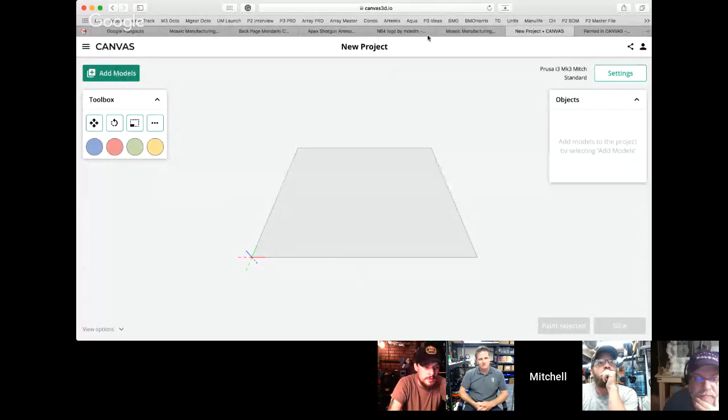So if I go ahead and download that, and then I launch into Canvas here, I'm going to make a new project. So here's my workspace. I'm going to add the model in, which I did not actually download. Here we go. I'm going to bring in the N64 logo, and it's going to pop up there. And of course, it's a single color.

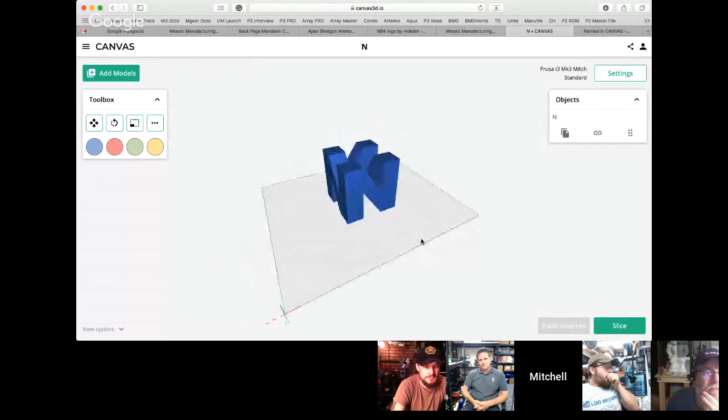If I wanted to go print that on my Prusa i3, then I could hit slice and I'd be good to go. But let's turn this into something that looks closer to the actual logo from N64.

To do that, I'm going to click on this. I'm actually going to rename it. Let's call it N64 logo. And then I'm going to hit Paint Selected. So we just launched into the Paint view here.

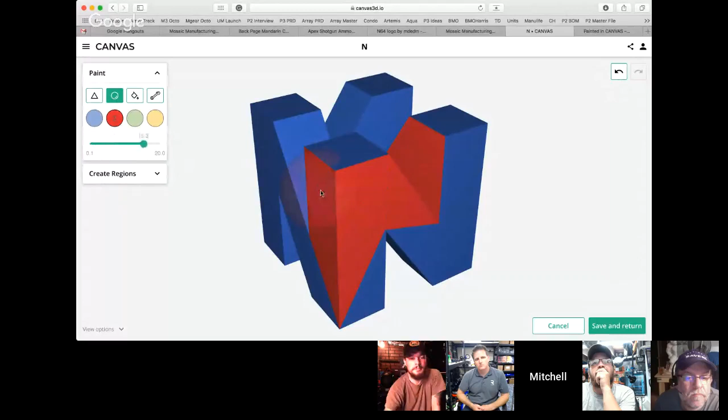And in this painting view, I have a few different tools. This first one is going to let me paint a single triangle like that. Sometimes that's really good for little details. This next one over here is a paintbrush. This is going to let me paint multiple triangles. Again, useful. And I can change the size of my head, so by making it really big, I can paint faster.

One of my favorites is this paint bucket tool, kind of like in the old MS Paint. So what I can do is I can go in here and create regions. What it's doing is auto-segmenting the model to create different regions for me that I can then paint.

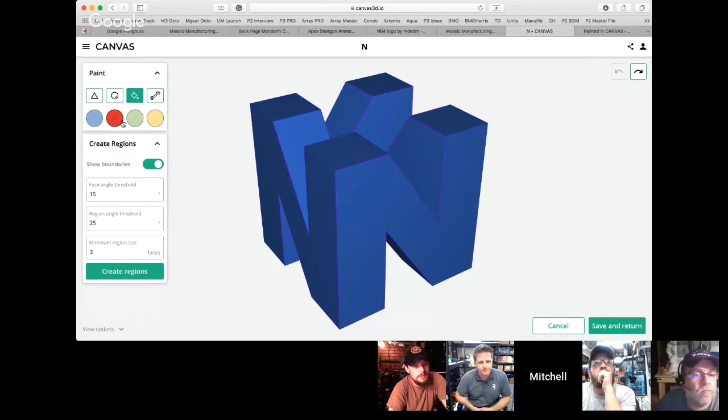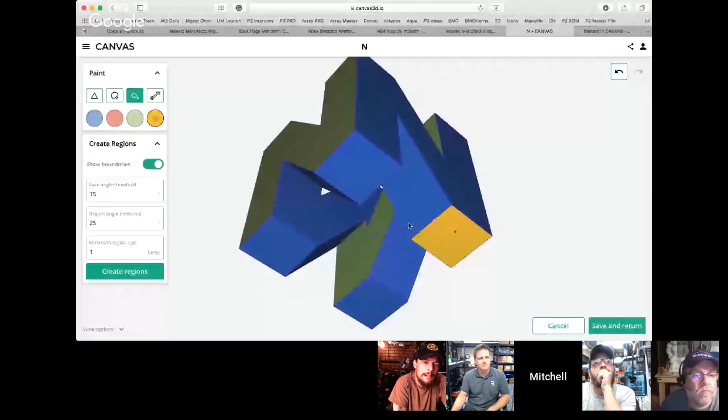So to try and make it look like the actual N64 logo, I'm going to go in here and make this side green. Oh sorry, I'm going to auto-segment. I wonder if I should go to, here we go. I'm going to make that part green, that part green, that part green, this part yellow. I think that one, that one, that one. And there we go - in literally like 30 seconds, we've now turned a single color STL into a 4-color one.

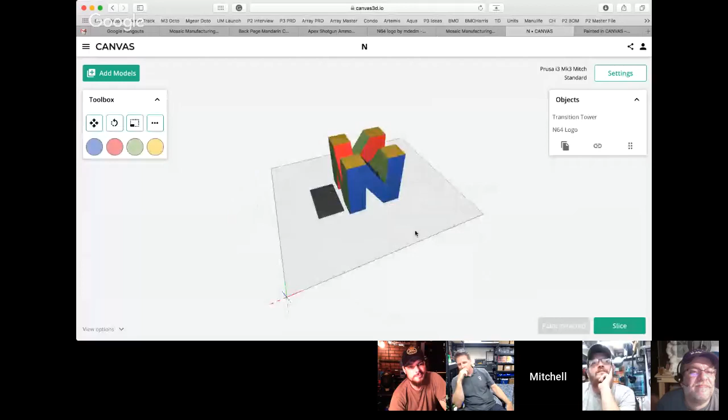I can save out and return here, and this guy is now ready to slice. I can do whatever I want with it - I can make it bigger, smaller, reposition it. I'm going to move this guy to the front of the bed for printing. I'll take the tower, put it behind so it sticks nicely. I'm going to stretch it out a little bit. And now I can slice.

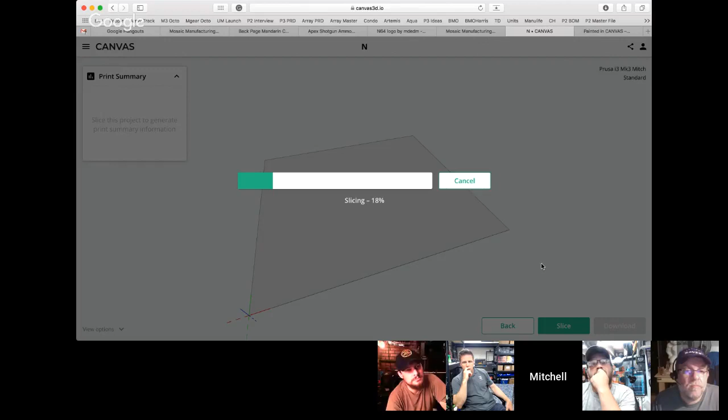So what we just did is, again, took a model into Canvas, we painted it up, in this case using the paint bucket tool. Now Canvas is processing that model, taking the color which is on the surface, and creating tool paths which will print really nicely on the printer. Because in 3D printing, for anyone who's used multicolor printing before, you'll know when you have color on the surface of the model, it isn't just on the perimeter. There needs to be a 3D toolpath that goes into the plane of the model, and that helps the extruder be more consistent in terms of flow, meaning the part will be durable. So Canvas is now taking care of all of that automatically - no matter where you added the color, it's going to make sure the toolpath will print nicely and look nicely.

So I got a question for you along those lines, because I'm curious, and I think a lot of people are: is there an intelligence to the amount of depth it uses to apply the color based on what the model is?

So for example, if something's 10 millimeters thick, does it go 2 millimeters in, or is it always a certain depth? For right now, it goes as far as it can, trying to create as big of a region as possible to give it as much flow as possible and the structural rigidity it might need. So the simple explanation would be it's going to the middle of the model, trying to create a pie shape.

If you have a circle, like the BB-8 model we'll do after, you'll see it starts creating these almost pie shapes into the center. I think the circle is the easiest one. If you get to a rectangle, it's going to create a line through the center. It's not actually going to the center of the rectangle, it's going to try and go sort of nearest neighbor across it, if that makes sense.

I can't imagine the algorithm you had to figure out to do all that stuff, man, that's bananas. And when you're using that, is it the same for the paintbrush tool or the paint bucket? Is the logic basically the same?

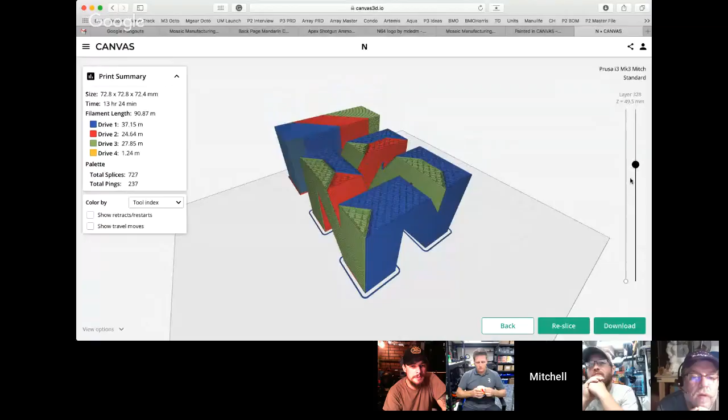That kind of was a question I was going to save towards the end after the demonstration, but that answers it a little bit. Canvas Slicer on the back end is using Kiss Slicer then to do the heavy lifting of the slicing? Yeah, for the most part. We've made some modifications ourselves to Kiss Slicer, but for the most part it is very similar. So things you'd find in Kiss Slicer, settings or things you'd expect there, are similar to what you'd see in Canvas as well.

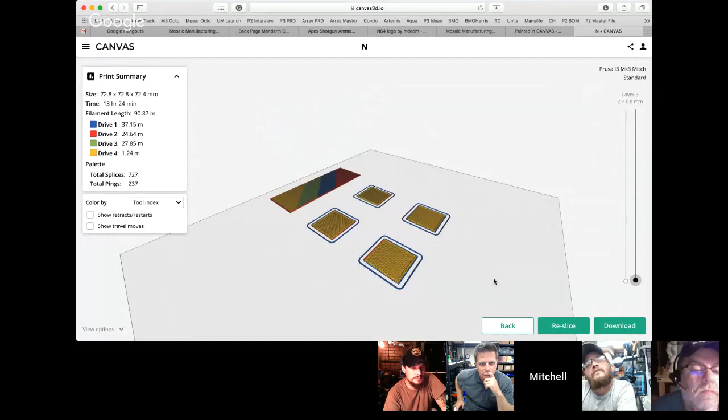Okay, so right now it's been sliced, sent back to my computer, and we are in the print preview. Let's start at the bottom here, and this is actually a really challenging region to think about how it could possibly be colored, because it's essentially a rectangular prism where the bottom is yellow, and then instantaneously the sides are all different colors, and they need to have an infinitely small thickness at the beginning.

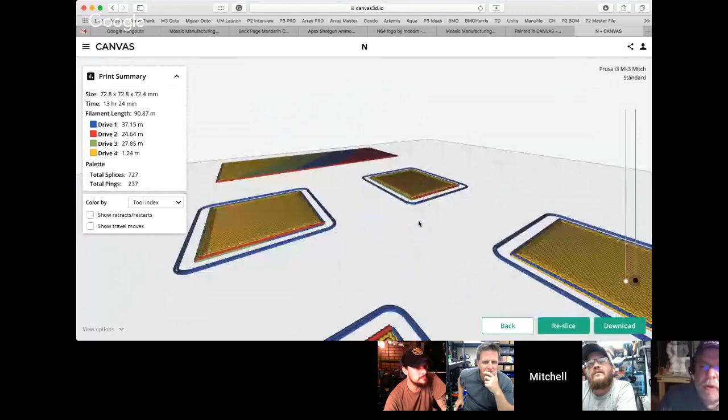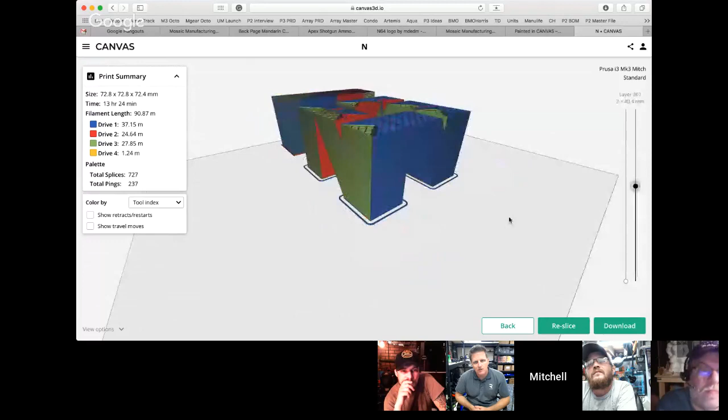So you can see what it's done here. It made the bottom couple layers yellow, and then right away it adds a single line. You can see right here on the sides, green and red. And then as it builds up, it creates that pattern into the part like Derek was saying. You can see the green is coming as far in as it can without stealing space from the blue or the red, and that way we're getting reasonably consistent extrusion as we possibly can. Then as we come all the way up, it's figuring out at a layer level the best thing it can be doing, and right when we get to the top, we get back to that cap of yellow.

So I imagine part of the advantage of doing it that way too is you're minimizing the amount of splices that have to happen, since you're painting as big of a region as you can before you have to initiate another splice.

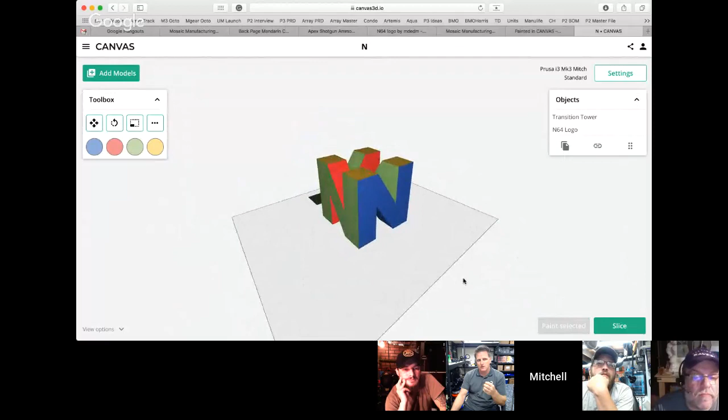So an example that comes to mind is the traditional way models will be broken up. Derek has a video on YouTube, one of our most popular videos, showing how to take a single color STL and break it up in Mesh Mixer. Not to hate on Mesh Mixer, because it is a very powerful tool.

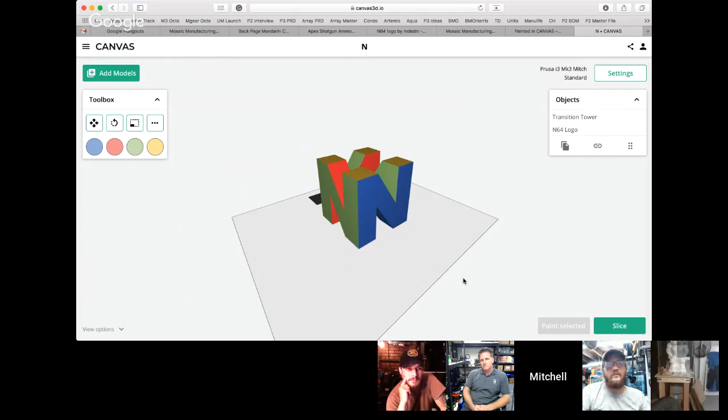But the way that's done is really different than the way we're doing it. One thing it'll do is create a 3D geometry into the part, and sometimes it won't just go into the part, it'll go down into the part and put colors on layers that aren't even seen on the outside. So your palette or dual extruder, whatever you're using, will create extra color changes for details that aren't seen, wasting time and material. Canvas is not putting color or splicing anytime you can't see the color.

Hey, it's funny what you just brought up. I'm going to hold this up here, you're probably not going to be able to see it, but this is blue on the outside, yellow here, but in between there's red. It did exactly what you said - it's putting colors in places, and I was watching it print and thinking, this is kind of weird how it's doing that, why is that splice going there, why is there red coming up at this point? But it's exactly what you just pointed out.

Thank you for explaining that. Of course, no, absolutely.

Maybe just before we jump into the BB-8 as a model that really shows off the power of paint, let's talk for a second about the vision - why we decided to build Canvas.

There's other slicers out there. In fact, for the first few years of Mosaic, we chose specifically not to build a slicer. We wanted to focus on being the best at one thing. We made a software called Chroma, which is still very popular today - it works with Simplify 3D, Cura, Slicer, all of them as a post-processor.

But we were trying to think about the future and what the experience needs to be like for multicolor printing to be adopted as the standard, so that a few years from now, when a printer is purchased, it'll just be commonplace that a printer makes multicolor things.

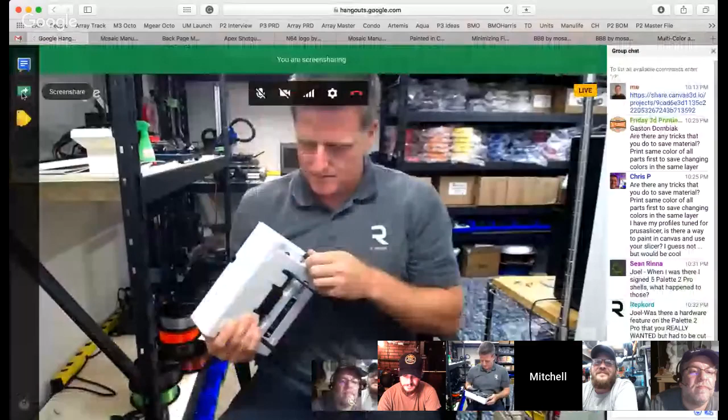But I really wanted those to be RGB LEDs, so when you were loading a specific color, they would flash that color, and you could do cool lighting effects, a bunch of cool stuff with it. I'm pretty happy we still have that blue underglow that shows up with the lights, but it would have been even cooler if it was nice and rainbowy, like it looks more like a gaming computer. But that was something that always got cut because RGB LED was maybe like 5 times the price of a regular LED, and frivolous. People already are complaining that palette is too expensive, and I understand if you have a 3D printer that maybe costs less than your multicolor accessory.

So maybe the LEDs weren't that important, but who knows? Maybe let me know and we'll add it into the next one. It's funny. Go ahead, Chris.

I like that idea a lot because I still get confused when it asks for the white filament on the screen. I don't see the white filament, so the white light would cement it for me.

I was gonna say it's funny you say that, Derek. Back at MRRF on my Repbox, I actually did, on all the outputs of my rep box I have colorimeters. As the filament passes through, there's an RGB LED strip over top of the filament, and each row where there's a roll of filament will change to the color that's coming out of the rep box at the time. I used the splice feature of the palette and spliced together 5 or 6 different colors in a strand, and used that as the demo at MRRF, so as I pulled it through and the filament changed colors, so did the lighting inside the box to match whatever was coming out of the box.

It's funny you say that because I'm thinking the same thing. That would be really cool, especially since there's people who use their palette to create multi-split or multi-color rolls for even more random transitions and stuff like that. Being able to see that color changing as it comes out would be really neat. Yeah, that was a good setup.

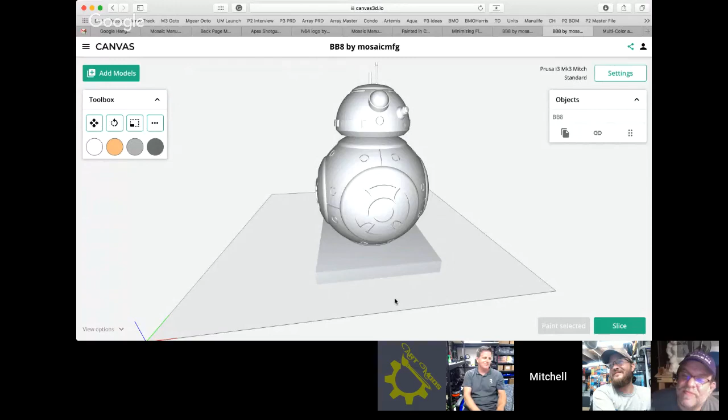Awesome. Okay, so one of possibly the most iconic—would you call it an action figure, or model, character, robot? Well, it's more recent though. Like R2D2, I guess, would be probably a little bit more iconic. But BB-8 is pretty cool with the orange and stuff, so in all white it just doesn't do it justice.

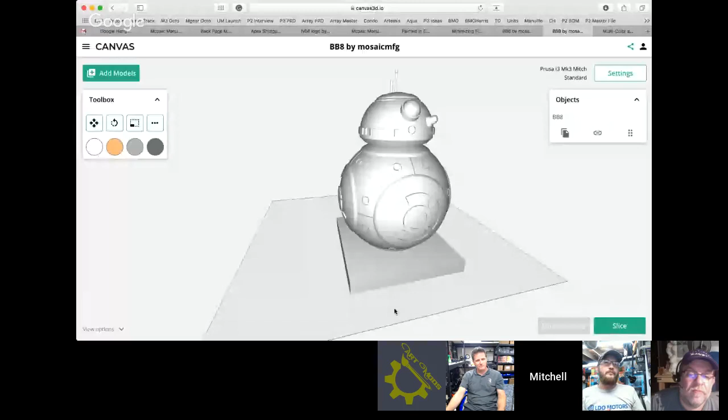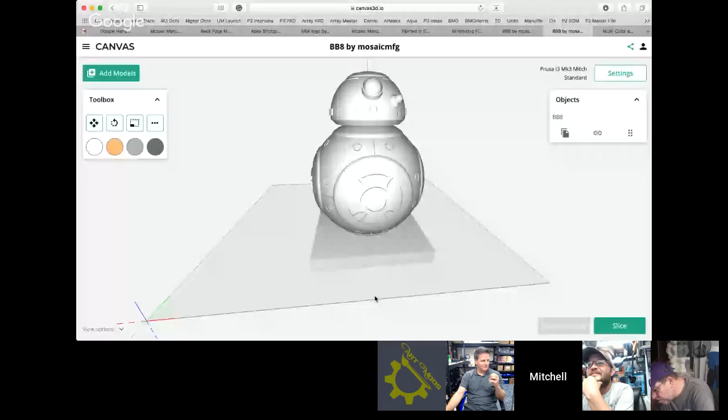So right before we jump in, just to explain why what we're doing is different. Derek, I know that you colored this model using Mesh Mixer a long time ago. What would you estimate that it would take to do this in Mesh Mixer? And then how fast do you think we could do this in Canvas? Most Mesh Mixer projects take me probably an afternoon, a couple hours, like 3 or 4 hours if I was actually focused, hours at least.

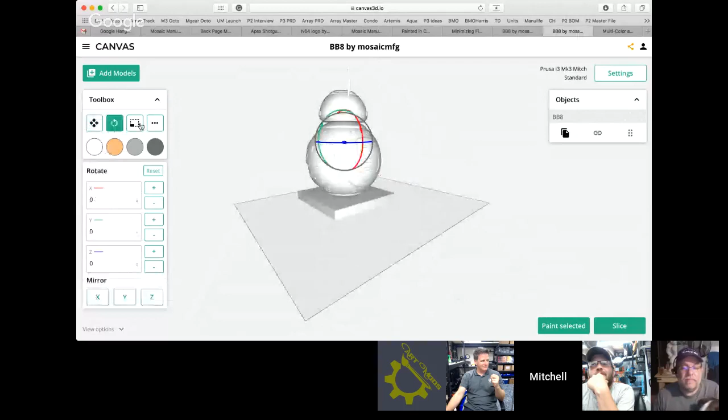If focused, okay. And I think we'll see with some of the new tools how fast we can do this. So again, we're now in the project view. We've brought in the single STL. Over here, I didn't show this before—these are kind of your traditional things that you do with a model. So if I click the model, this one will let me move it around. I can rotate the model, scale the model, drop it to the bed, all the traditional things that you need to do.

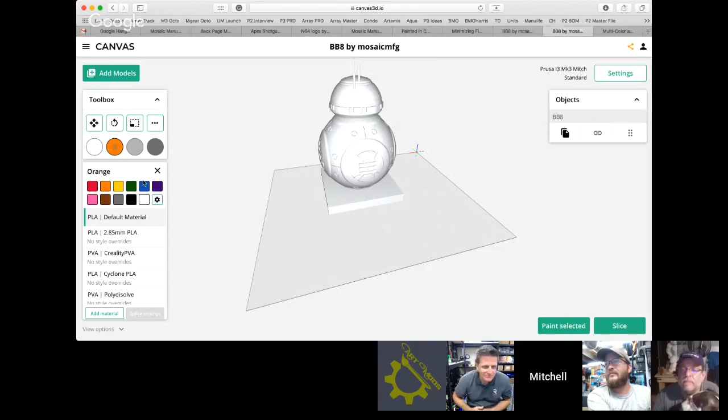And then here, these are the different colors that I'm going to have eventually loaded into my palette. So I've already preset the colors to be the BB-8 colors. For example, if I wanted this to be blue, I can go and change that to blue, and then I can adjust the exact shade to match the filaments that I'm going to be using. So these are the 4 BB-8 colors. I'm going to click, and I'm going to go into Paint Selected so that we can actually paint this model.

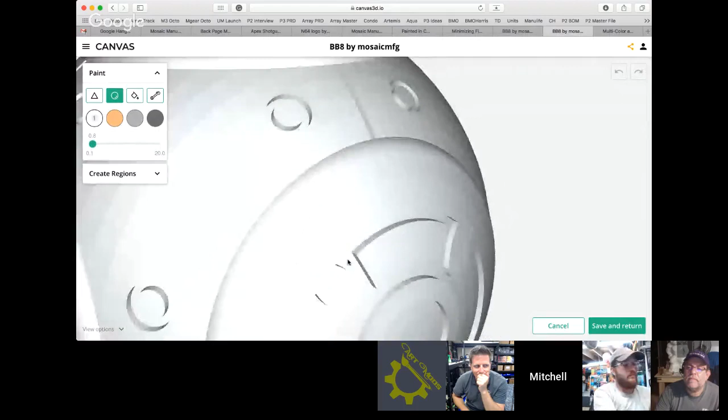So again, we've got the different tools. One way that you could paint this, and this is how I tried to do it the first time, and it's not the smartest way, would be to come in here and using this paintbrush actually go like this. And I can make the head different sizes.

And I can take my time, and I can make sure that I'm getting all the right sort of triangles to color the right sections. This might take a while, but once someone's done this, it can be shared and no one will have to do it again.

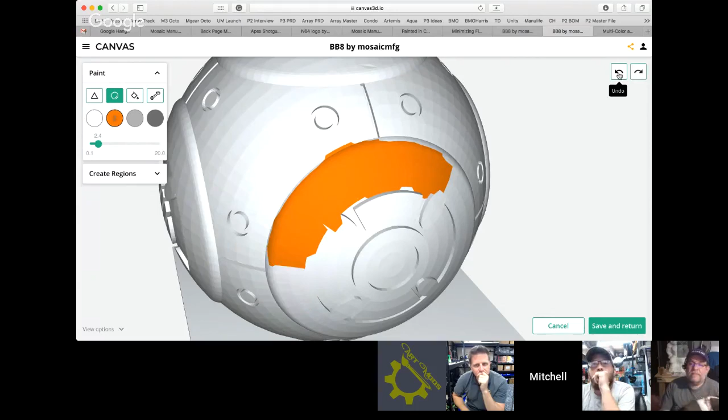But that's not the best way to do it, and Derek showed me the best way to do it. So I'll let him take over here and show us what to do in Paint. How would you do that faster than I just did?

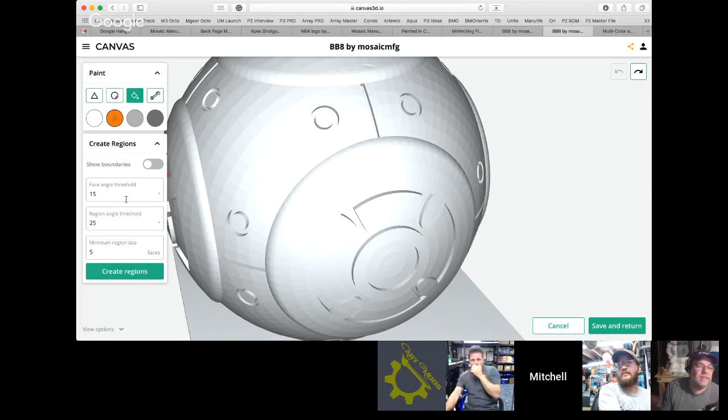All right, you'll have to forgive me, I'm not used to using a trackpad. A mouse is much better for this sort of work, but Mitch has got me set up here on a MacBook. I'm a Windows user too, and that's making me cringe a little bit.

But so we're actually going to create regions here. We're pretty lucky that there are some nice boundaries in this model already that the algorithms can go through and sort of split apart, creating edges we can find nicely between.

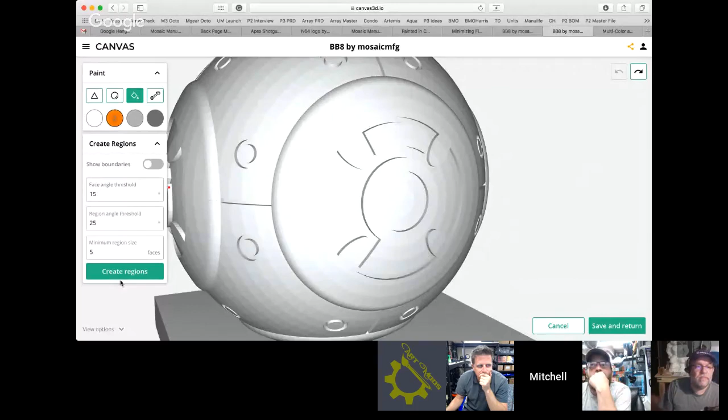So let's just try the defaults for now and see how that does. That's looking pretty good, you can see all these purple lines. We did this before: the fill bucket will fill all the way up to the purple line and get you started without having to go through and paint each thing.

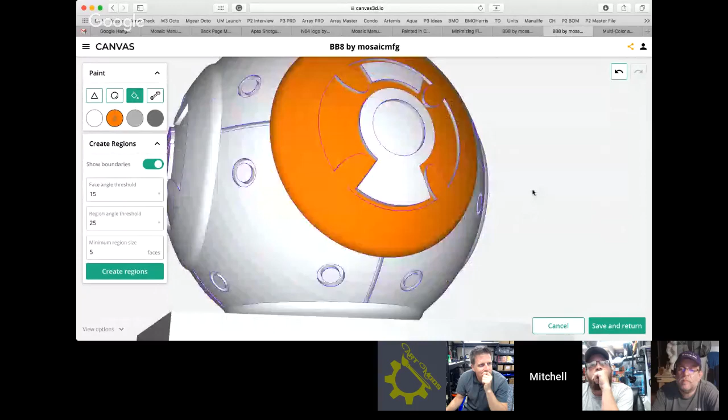So here, I can just show that there. So that didn't work so well. We're going to go through and change the settings so that we get a better edge here, so that I don't have to spend as long painting this.

And let's just drop this a little bit. You know what you used before, Mitch? Yeah, something that worked pretty well. 3, and that was 15. 15? Yeah.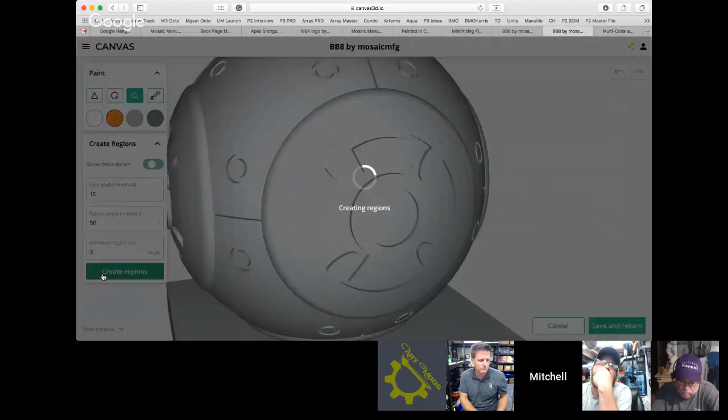All right, okay, that's arguably worse. Sorry, this sometimes takes a little bit of trial and error, but once you get going, it makes it a lot faster. That's okay, perfect demos are staged.

This looks like the end user would be working through the things, trying to figure it out. So I think this is awesome to show the problem-solving side of it too. Yeah, exactly, that's why we did this, right?

So now we've got that region, that's pretty good, and that's looking good. Okay, perfect. So we're going to be actually a little strategic about this because I've done this before and I know for this model that it works.

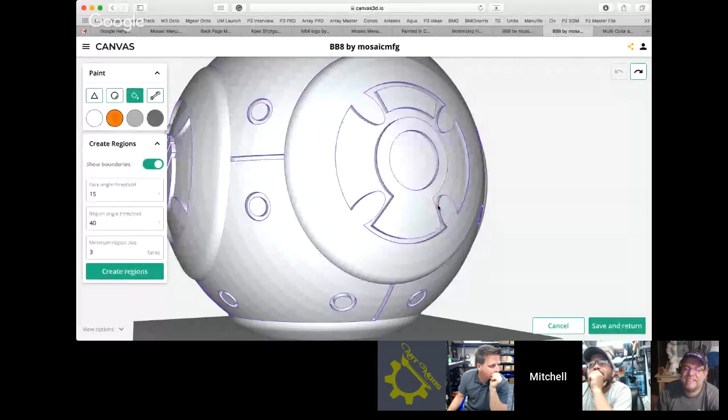But because of how the fill bucket works, it's going to fill everywhere that there's a purple boundary, or up to that, if you turn the boundaries off, it will fill everything that's the same color. So kind of like, yeah, we're going back to Microsoft Paint here.

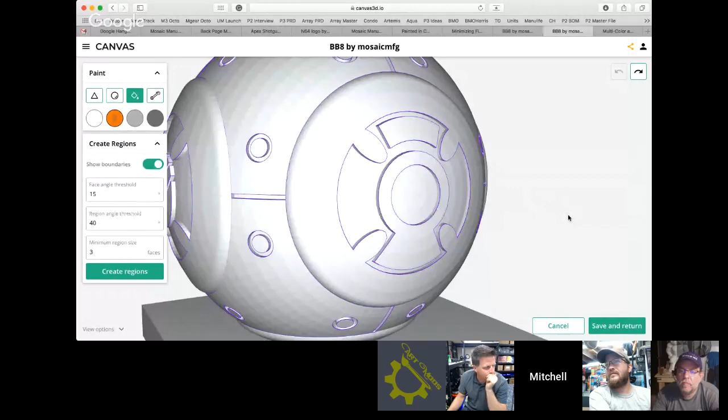So if you drew sort of like a paintbrush circle, you could fill in that center. So what we're actually going to do is use that to our advantage. We're going to use Create Regions and the Fill tool to make this super easy, or at least super quick. Maybe this will be a little confusing for a couple of people, but hopefully not too bad.

So we're actually going to do something weird, and I'm going to color this black just to save this as a region that's separate. And now you can see that these areas in the center here are completely just sort of islands in the middle.

And that means that if I turn these purple boundaries off, I can go in and very quickly turn them both silver.

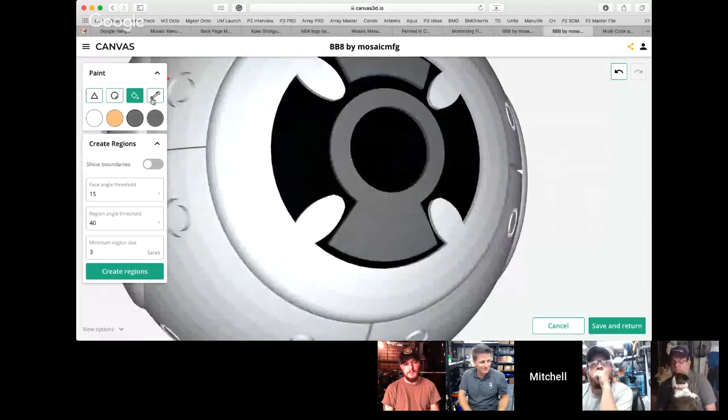And similarly, I'm going to turn Create Regions back on, and I'm going to turn this orange. But now you see that I have this border along here that's white. And if I turn that off, I can go in and click that, and there you go.

So I now have the orange correct and the silver gray part correct. And if I just fill this back to white, I'm all done that region. That was much faster than having to go in and paint every individual triangle, which is actually where all the time came with Meshmixer.

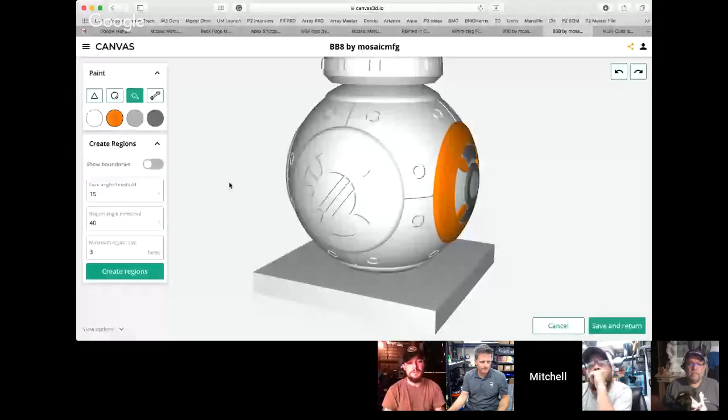Was really the hard part, was actually getting through and selecting each of those triangles. But that's still an option, right? So if you had a small little detail, you could go in and select a couple triangles to do a different color. Say if it was like a face and you wanted a highlight on the nose or something in white, you could do that.

Yeah, absolutely. So I'm showing a pretty advanced sort of method of doing this quickly. Now Mitch is sort of back in and he's just doing it roughly to sort of get us somewhere so that we can end up slicing this and seeing how it looks.

Sorry, I didn't mean to jump the gun. No, absolutely not.

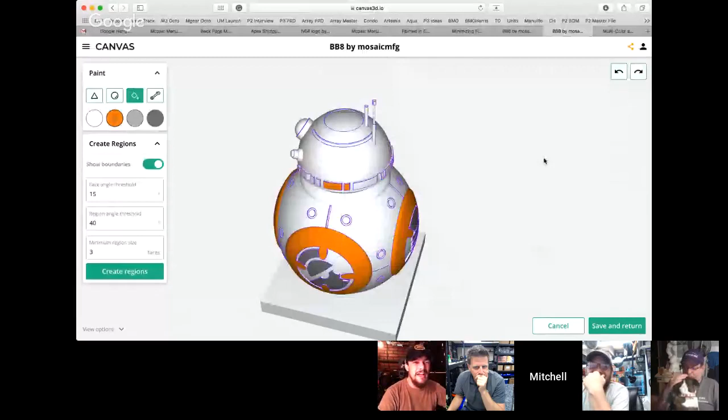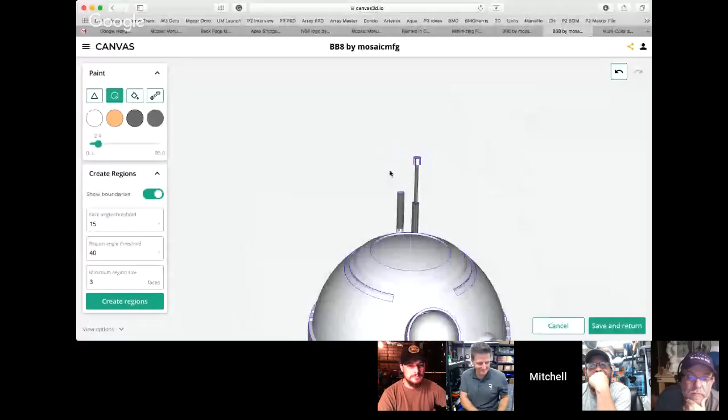You could definitely go in with that sort of brush tool, the sphere tool as we call it, and the triangle tool to get as much detail as you need, rather than going through large areas. This is great for models like this that have a lot of hard edges that the algorithm can see as different, but especially with a character model you might want to be more freeform, and that's where those tools come in.

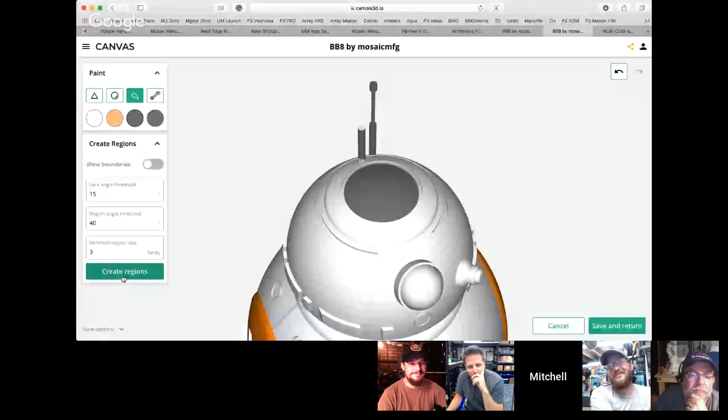I've given back the controls to Mitch, and he's just going wild, trying to rough everything in and get as much color in as possible.

Hey guys, while you're doing that, there's concern in the crowd that the pallet sale might end suddenly and people are going to miss their opportunity to buy. Can you comment on that?

Mitch, can you guys hear us? No comment, that was a conversation. You're like, oh, look at the time. Doing the collaboration and the live stream caused a little bit of lag in the desktop sharing, so it looks like we might have lost Mitch and Derek for a minute. Hey, they're back. Sorry, we were so busy painting we had no idea we were going to be on there.

Did you guys hear my question by chance? No, sorry we didn't. I was saying there's some concern in the chat that the sale might be ending suddenly and they're going to miss their opportunity to buy a pallet. Can you guys comment on that?

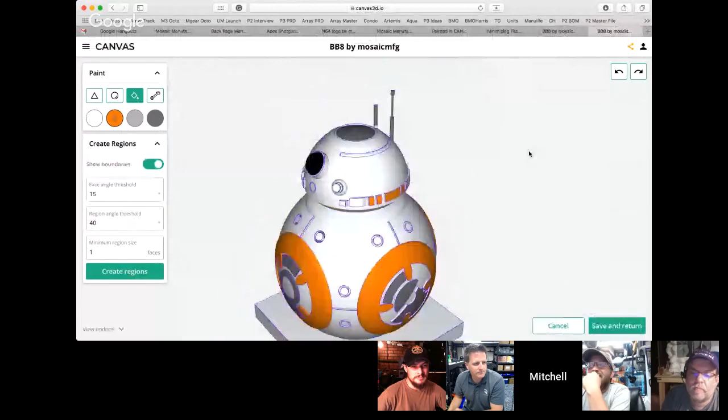All right, I've got another question in the room. Sometimes I get to a place where I need more granularity in the model mesh. Is there a way to take the model back to ZBrush to add more detail, then bring it back to Canvas without losing all the colorization up to that point?

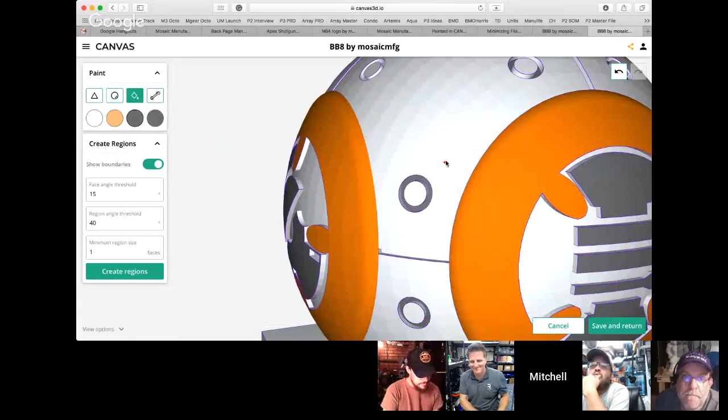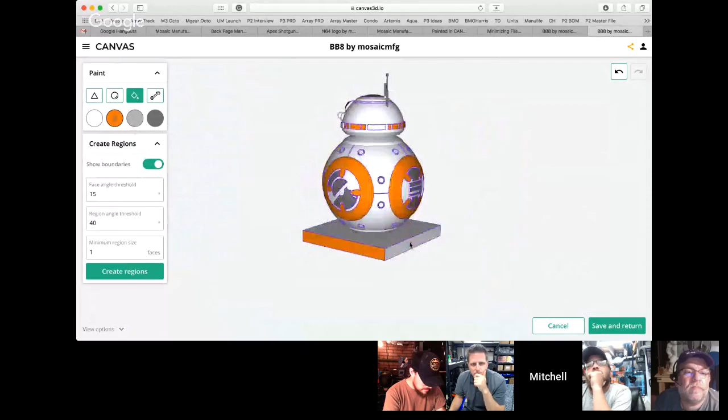Yeah, I definitely hear you. Unfortunately, as of today, there is not. We are working on a lot of cool features that will allow us to add more detail, like break apart triangles into more, or be able to bring in something like a logo and use that to create new boundaries. All I can say is stay tuned, it will only get better from here, but as of today you're stuck with the model you bring in. I'd say hang tight, we'll have more on the way.

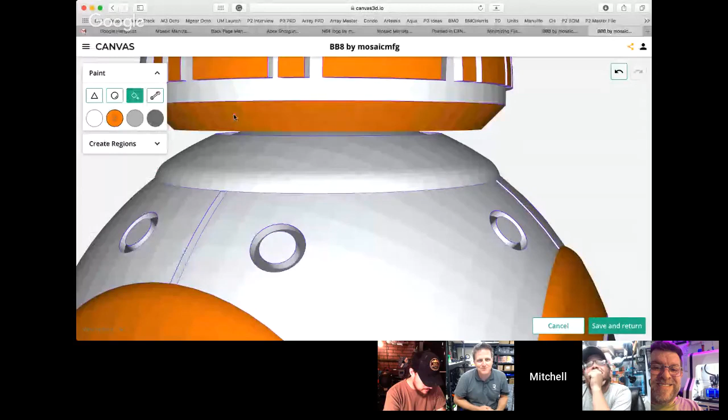Another question on the regions while you guys are doing that. Is there somewhere it's documented what's meant by face angle threshold or region angle? I've played with it to see what result I get, but I'm not totally clear on what the manipulation of that actually means. Yeah, no, we understand that.

We have some ideas on how to make that a little bit easier to use and more intuitive. So I'll try and give a quick explanation. I apologize in advance if this doesn't make a lot of sense.

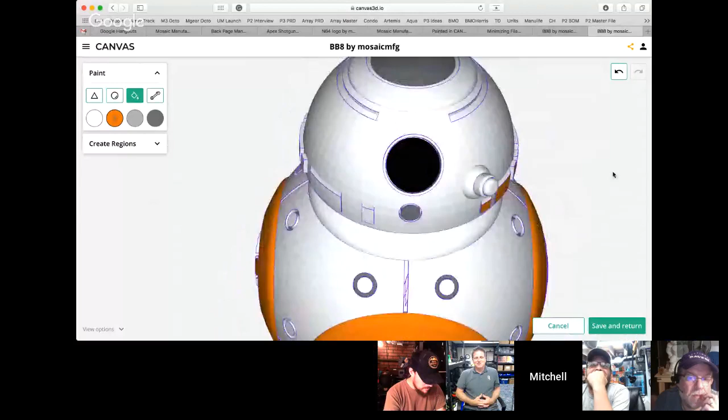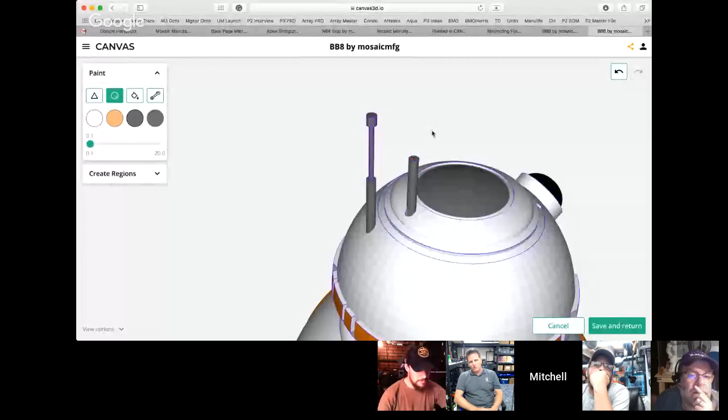The face angle threshold looks between faces, at the normals. You don't really have to think about that, but it's looking at the angle between two faces. If that angle is past the threshold, we should create a boundary there, like a sharp edge.

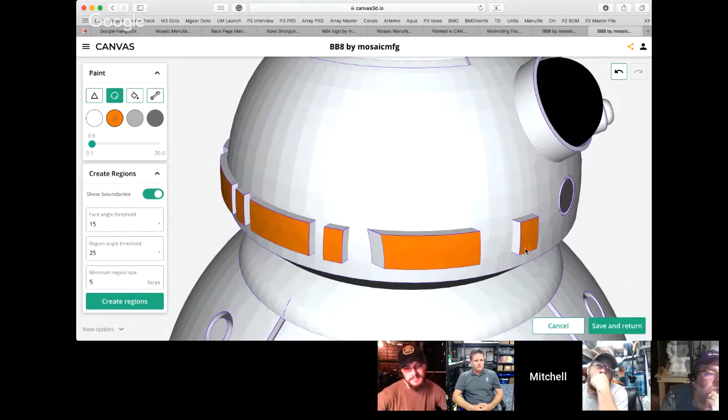After that creates the initial boundaries, it's going to go through and group those based on angles between the faces. In any one grouping of faces, it lumps them together based on the region angle threshold. So all angles within a region need to be within, in this case I think what we have on screen here is 25 degrees. If there's a break where a group gets more than 25 degrees apart, it will also break it there.

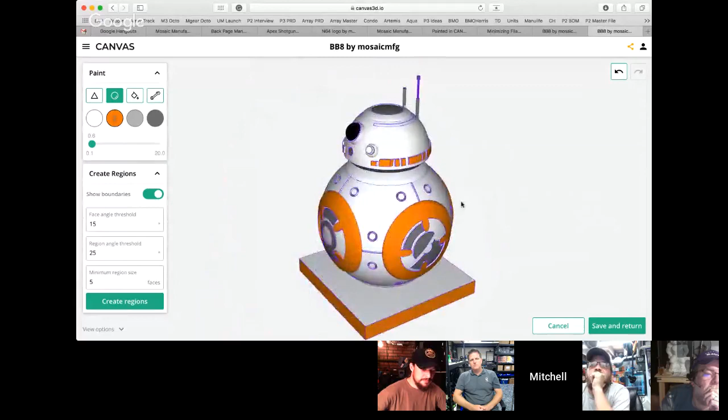And then the last one is minimum region size. Sometimes your faces are going to be so different that you end up with a bunch of little small regions. This will continue increasing that region size until you get a minimum of 5 triangles in certain regions, so it keeps expanding out to make sure you don't have really tiny regions.

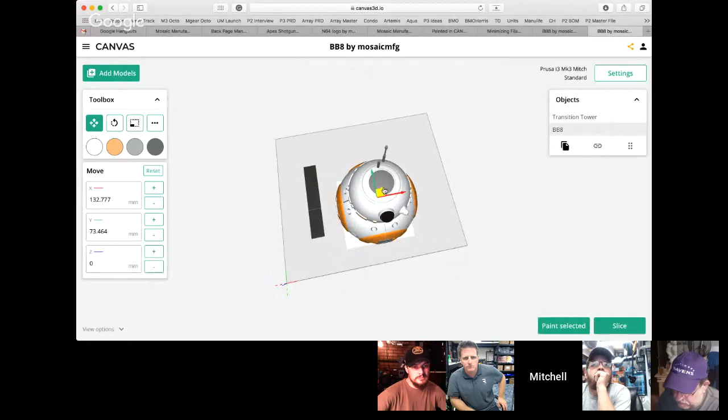I know that's not the best explanation, but hopefully that helps a little bit. We do plan in the future to have those be a little bit more like presets, maybe 3 different granularities. You can always have the custom inputs, but maybe be able to choose from presets that we know generally work for certain models.

I thought that was actually a really good explanation, I understood it. Honestly, I think you guys have done a good job of tooltipping most things. I just noticed it was lacking right there, and I was curious because it's so easy to play with and see the result, and you kind of have to do that anyway. Yeah, because it's not going to be really intuitive, like what angle you need for a specific model.

I'm also not 100% sure if the code has gone out yet, but we've made a couple of improvements to be more accurate on models that have really sharp corners, something that came out of CAD for example, and it should be a bit faster too. Forgive me, it's a Friday night, and I haven't looked to see if that went out late last week, in the last couple of days, or if it's coming next week. But if you haven't already seen it, it should speed up a little bit and handle things a little better.

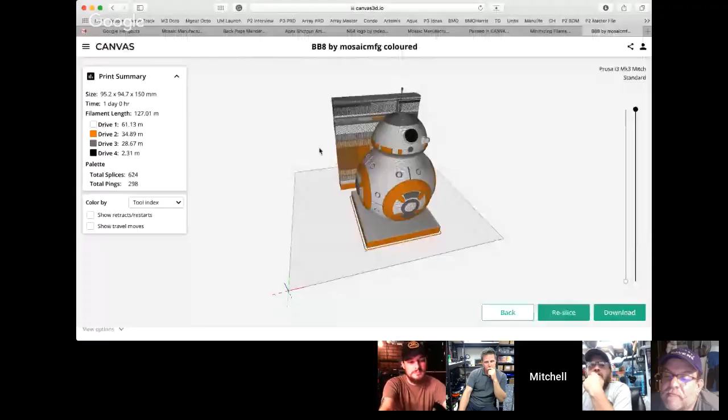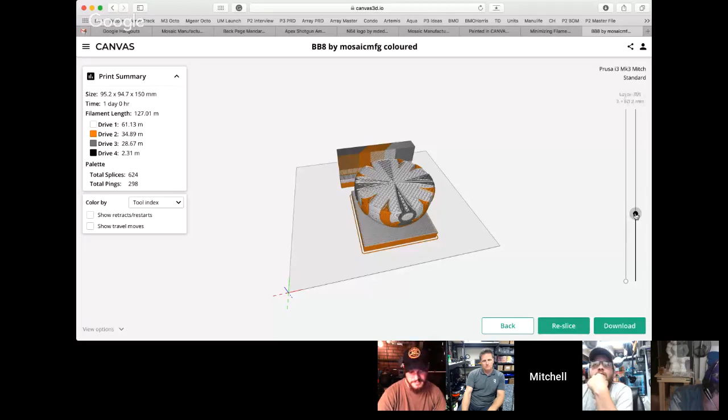One comment from the chat that I wanted to address: somebody was saying it looks a little laggy. I'm realizing while watching the YouTube stream screen capture that it does look laggy. I'd recommend you actually give it a try, especially if you're running a medium to reasonable computer, it's actually pretty performant. So give it a try yourself. I think the frame rate we're getting on the screen capture here on the feed is much lower than what we're seeing in person.

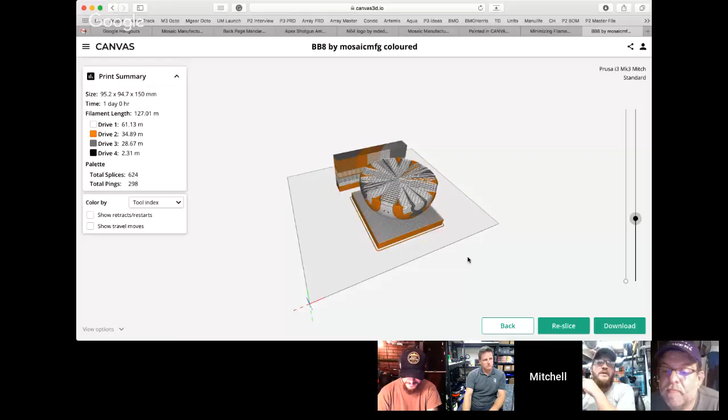I can vouch, and honestly everybody out there, it's free to create an account, and it's kind of an addictive tool because for the first time you can take any STL and apply color really rapidly. It's by no means perfect, but for a browser-based piece of software, as a developer, it's incredibly performant, I think.

Speaking of the browser-based side of things, one of the things we've wanted to bring to Paint - and before you go out and try it, it doesn't work yet - is touchscreen devices. So your tablets, when you pull out your iPad with your Apple Pencil or something like that, being able to actually paint on the model that way. By it being browser-based, you can pull it up anywhere, so if you start working on something on your computer, you can pull up the exact same project on your tablet, since it's in the cloud. It will also be able to work on a phone as well.

Because all the processing is done on a server, you can actually slice on your phone. We're working right now - one of our developers is working on a mobile user interface that will fit much better on even like a 5-inch screen. We're trying to make it fit on the iPhone SE.

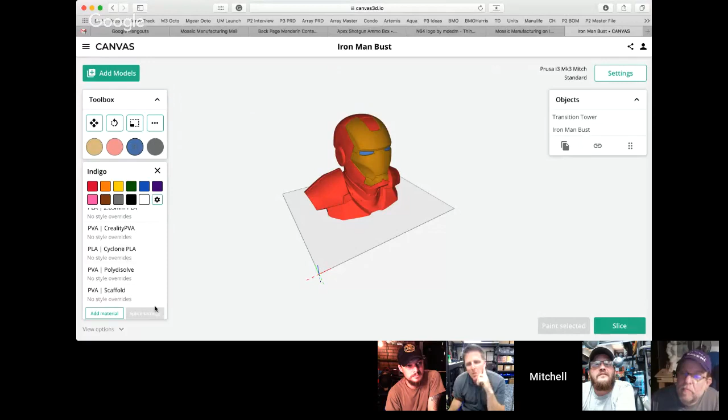But say the blue eyes here are a different material. So right now we have a bunch of PLAs and things that print pretty much at the same temperature and that sort of stuff. Other than the fact that I'm going to ruin Mitch's account, I'm going to go through and add a PETG in here. And this is where you can add overrides, so anytime this material is being used, it will set these settings. So I'm going to click here, and you can do a bunch of different things.

So print temperature, I think, is the one we're asking about here. Say you wanted to print your PETG a little bit hotter, so we're going to go up to 230 degrees, say. You can do that. Oh, I have to call it something other than that - Test P. And it shows up in the list here. And for blue, now that I have blue selected, I'm going to go and select that. So now I have this one, which is just the default PLA, and then we have the PETG down here.

You can confirm that this works by going up into your settings, and we're going to go down to temperature. We're going to see a bit of a bug, but generally you would see this properly working, where you have the temperature that's going to be used on default, and then the extruder that's being overridden to a different one. I imagine this is just a visualizer, but if you actually end up slicing through, you'll get the blue using 230. So there you go, and you can control a bunch of different things: filament diameter, and you can change print speed that way.

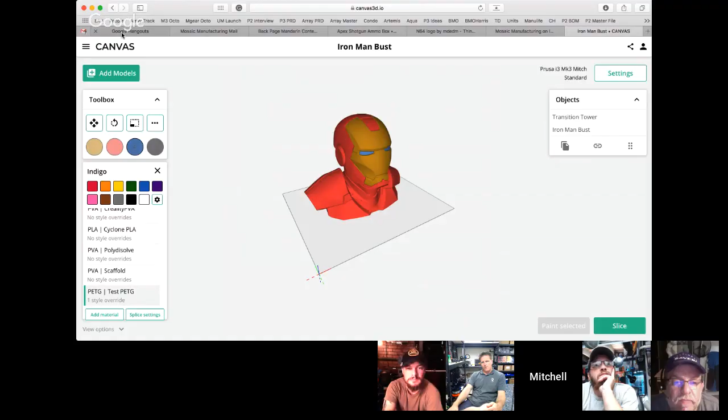How would filament diameter work, given that the palette can only run 1.75? Sure, we're going to come back to that. It's more relevant if you measured your filament with calipers and saw it was actually 1.74 rather than 1.75, and you wanted to get it really accurate for perfect extrusion. This was more of a thing a couple years ago when filament manufacturers weren't that great at making 1.75mm filament. It's less of an issue now.

But we do intend Canvas to be used not just by palette users. When it comes down to it, it's a slicer—you can bring in multicolor or single color models, slice them, and print them. So if you wanted to use it as your single color slicer of choice for your LulzBot, printing in 3mm or 2.85mm filament, have at her. That's the ultimate vision, that it's not just for palette. For right now, it was easier for us to develop something for the users we knew and definitely want to support first and foremost. But there's no reason it couldn't be for other people too, especially if you're looking for something cloud-based that you can use across devices—maybe it's a good choice for you.

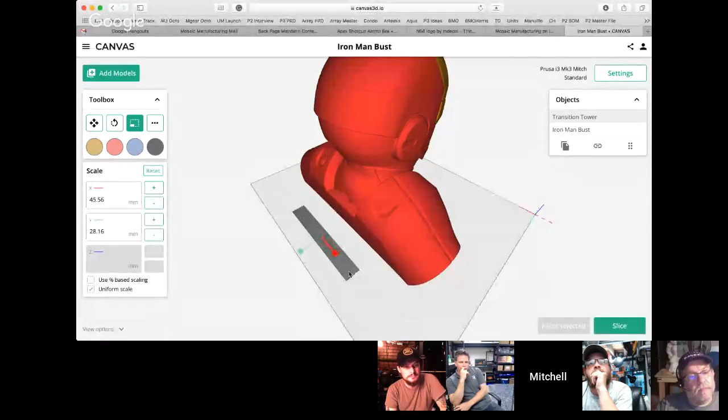I think there's a limit to how thin you'd want to go, because then it becomes very hard to get it to stick. But in the same way, if you make it a really dense square, you'll probably have cooling problems where the inside's really warm and the outside's a bit cooler, and it might warp a little more.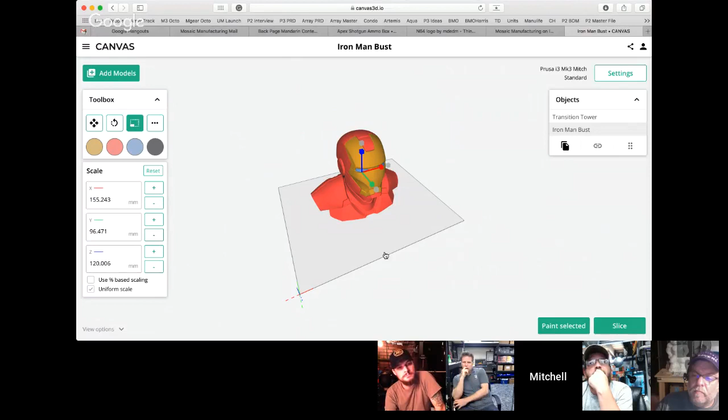RC Maniac 25 in the chat asked if there are any plans to update Chroma. Chroma is definitely not going away anytime soon. It will be supported with any future or next hardware release, 100%, and I don't see why we wouldn't do it with the next one. And when I say the next hardware release, I mean something that might be coming later this year—we've teased it before, so I'm not making anything up. For those of you worried about buying a Palette 2, anything we release this year will be fully upgradable to that model.

So if that gives people any hints as to what that model could be like, sure. Maybe I'm saying too much at this point, but I'll stop. Yeah, Chroma is definitely not going away anytime soon.

I think we know that it's an important tool. Simplify3D is a great slicer, Cura is a great slicer, and they each have features that we can't build into Chroma or can't build into Canvas. So I think it's coming. It's gotten to a point that it's pretty stable.

I think you'll see more bug fixes than feature additions, because one thing we found is as we add more to it, we end up breaking things. As we try to support so many different types and flavors of G-code, it gets messy when one printer or one flavor expects to retract one way, or Z-hop before it retracts, and all these different edge cases that we've gotten pretty good at.

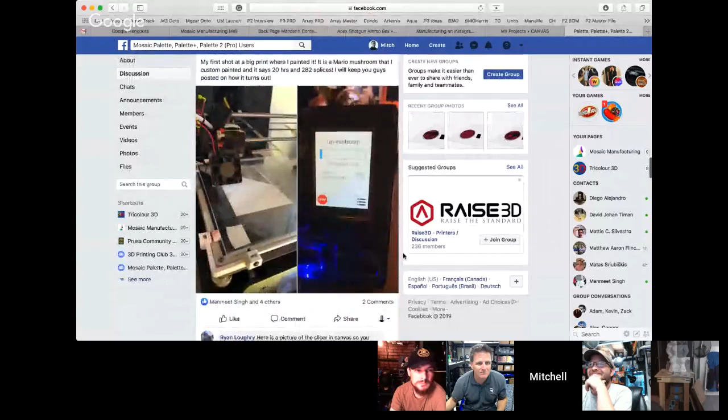I think we also have a short link, mm3d.co/FB or /Facebook, one or the other should get you there as well. You can see some cool things people have painted and printed with their palettes. If you ever have questions, there are great people there. I'm there, I think Mitch chimes in as well, and we have some great Mosaic team members actively engaging with people. There's a P2PP post pretty high, close to the top, talking about some features that were added there. So yeah, a pretty cool group.